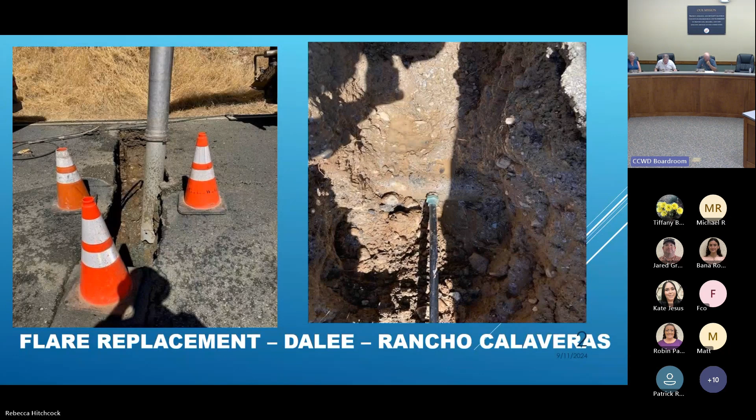So here we are with the flare replacement on Dalee. These come up when the service lines are replaced, oftentimes as a result of the failing flare on the water main. In the image on the right, you can see the water main is partially exposed with the flare connected, and the great work the Jenny Lind crew is doing, you can see the service pulled out of the ground with multiple repair clamps on it.

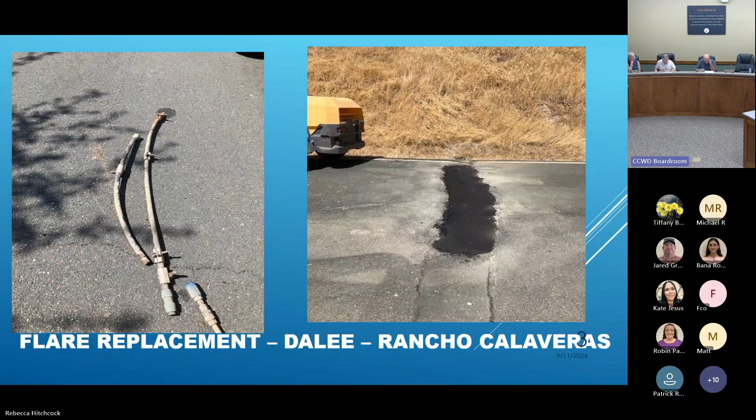So with 37 service lines over the last year, we're still in the noise phase of figuring out what we're looking at in terms of failure. We have just too many right now, and so we need to get ahead of that. That's part of the good work our utility crew does.

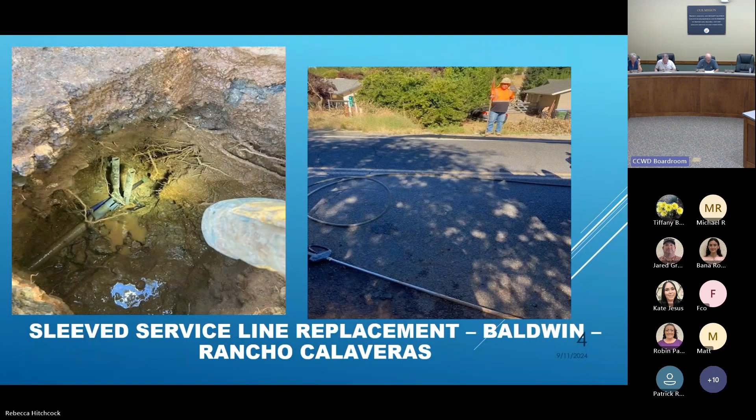This was an interesting one, excuse me. Service line on Baldwin that was sleeved in a piece of plastic that developed a leak, so our folks replaced the entire service line. You can see it sitting in the conduit there in the image on the right and the left. But what's really interesting is the poly developed this like blistering.

We think it could be from the heat sitting inside the piece of conduit and getting hot. Our guys out in the field had never seen it before, it's really interesting. Do we have a lot of that material out in the field? We do, we have a ton of it. Most of the service lines in this service area, actually all of our service areas, are made out of polyethylene.

So we've seen it flake off, almost like if you can imagine a corn flake coming off the poly, but not bubbling like that. At least these folks have not seen that. Is that something that could cause a break? I would definitely think it would have an impact on the integrity of the service line over time. I have a piece of it in my office, actually, I was going to bring it but I forgot.

You can see the inside of the line, and it doesn't look like that, it's not that. So I would say over time, I'm sure, but in this case it wasn't the result of failure. How long had this one been in the ground, any idea? I mean, judging, I would say for quite some time, perhaps 20 years, but that's just a guess at this point. Could it have been damaged like that in the beginning and then they sleeved it because it was damaged? Good point, could have been.

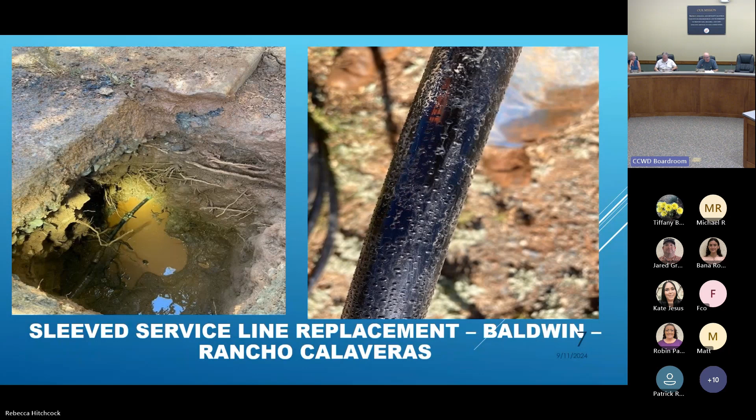Could have been, it's just kind of one of those ones that makes you scratch your head a little bit, because there shouldn't be any air or anything to create heat down in there. That's a good point you make, actually. Could it have already bubbled like that and they used it anyway? Yeah, let's put a sleeve on it. Hey, it's bubbling, let's put a sleeve on. Yeah, that makes sense, take them a while.

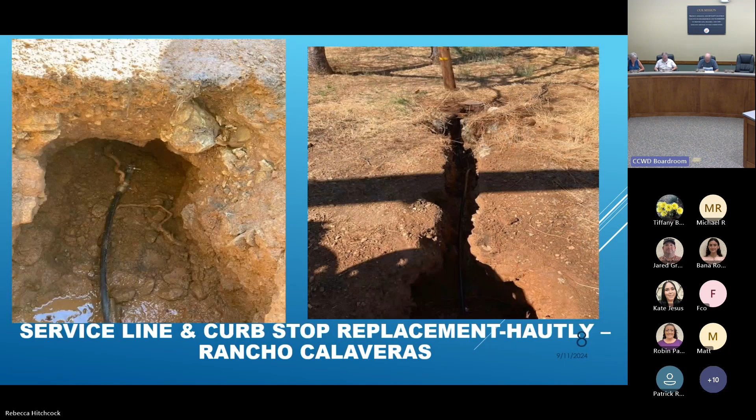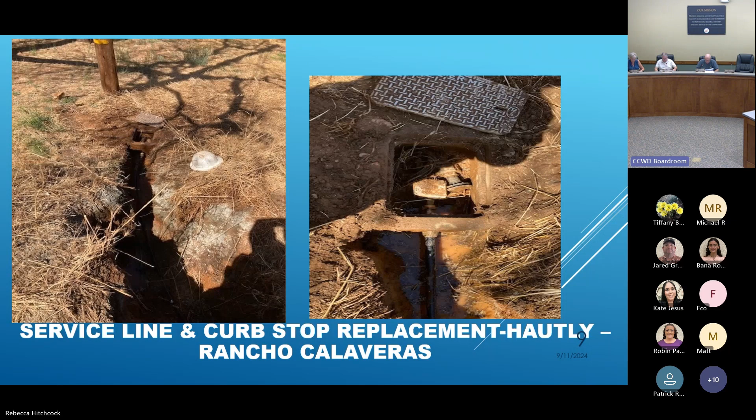More of the same service line and curb stop replacement along Hautly. Can't say enough great things about the work our folks do. Kind of the new flavor in the image on the right is you see a new Mueller meter with a node next to it. With the meter box lid somewhat askew, the node is actually the antenna. So that's what some of our meters down in the low country look like now. I guess they're called high pressure meters there.

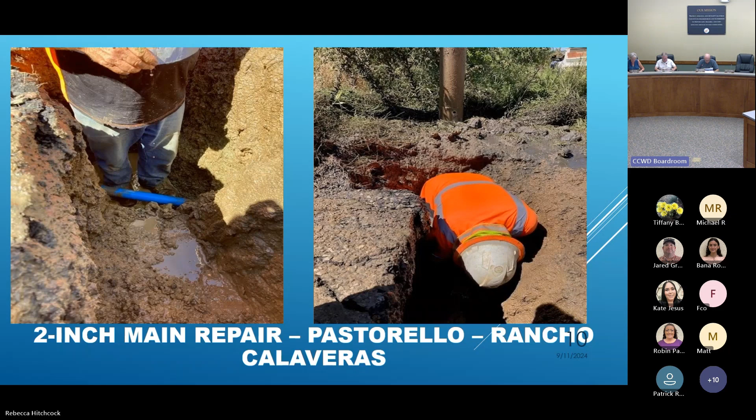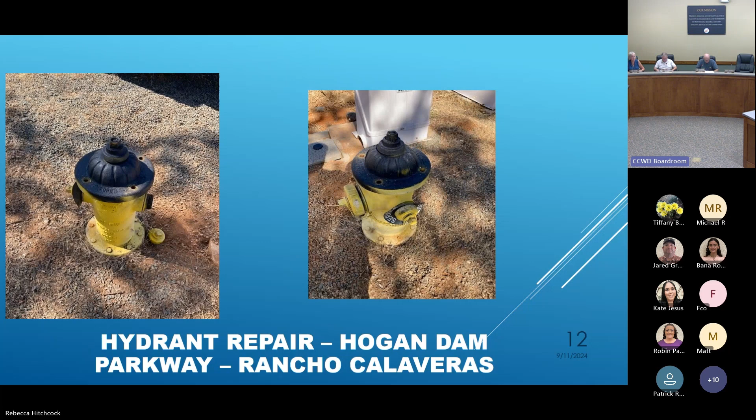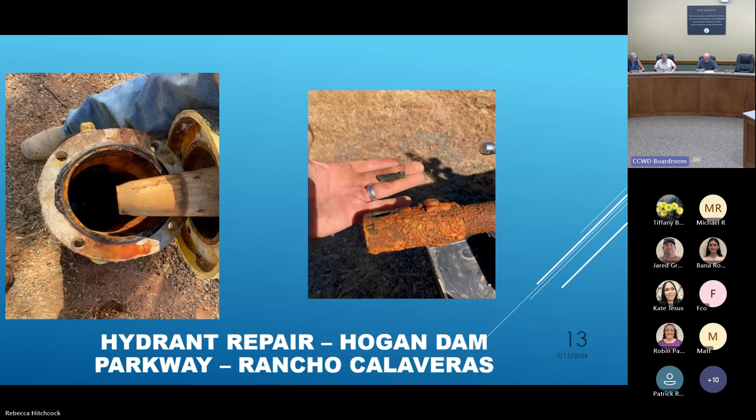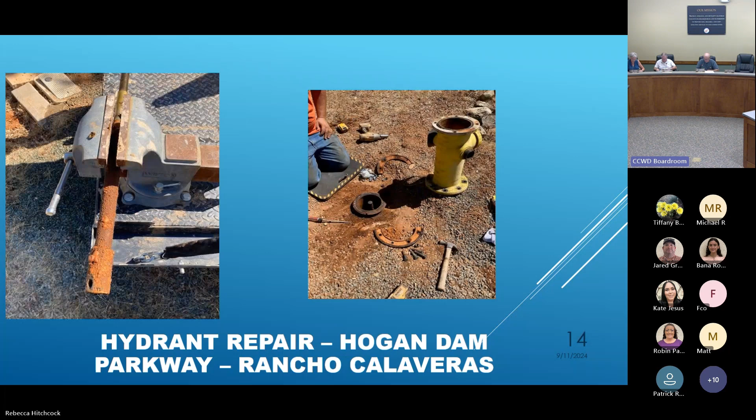Hydrant repair. We had conversations last month with the fire protection groups, an after action review of the Arrow fire, talking about how the district works with local fire departments to ensure the integrity of fire hydrants. This is more of that conversation along Hogan Dam Parkway. We have a stretch of distribution system and this fire hydrant was out of service. Walking through the stem with the bolt at the base of the stem, you can see it had just broken off in the image on the right. So our folks will go in, take repair components, and replace the failed components to rebuild the fire hydrant. You can see the cleaning of the stem in the image on the left, getting off the corrosion, and in the image on the right, the breakaway flange being replaced, the body of the hydrant being put back after everything is cleaned and the breakable parts are rehabilitated.

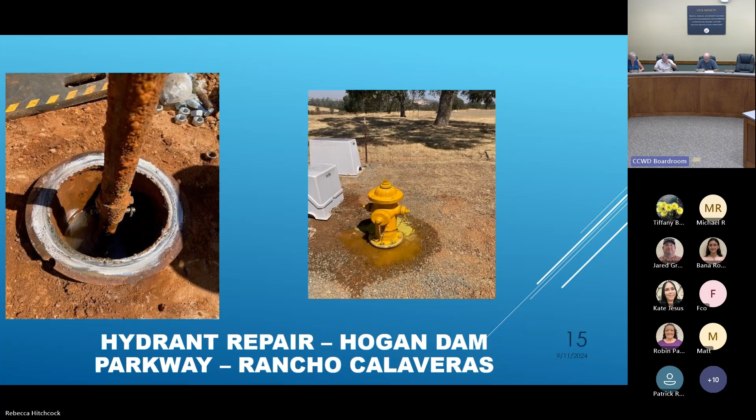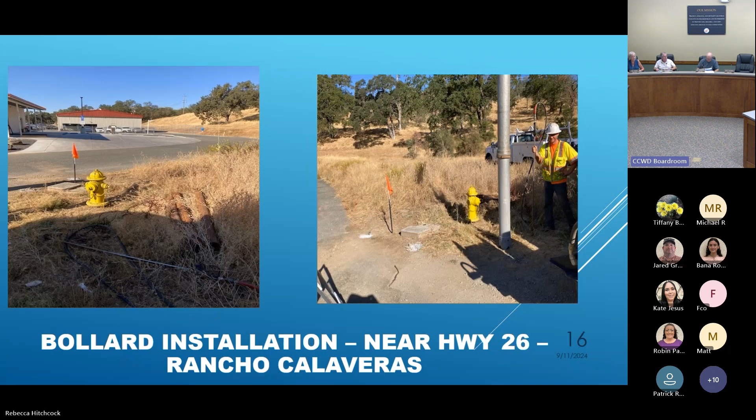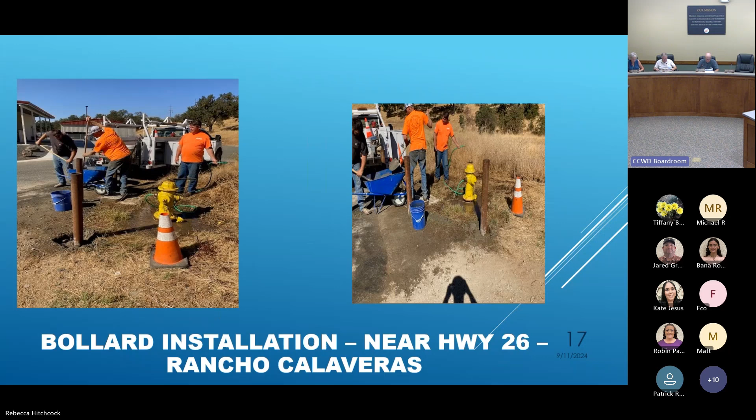Can't say enough great things about the work our folks do. This is an interesting one. We have some meter boxes that are just continually getting damaged from vehicle traffic, so sometimes we'll install bollards to protect the meters, and that's what we did here. The distribution crew members poured steel pipe filled with concrete in front of, in this case, a fire hydrant, and then paint those safety yellow to keep our infrastructure protected. Actually, there's a meter too, keep everything protected.

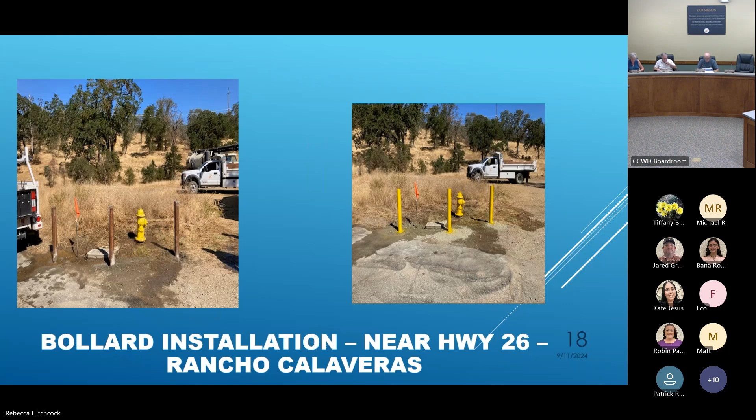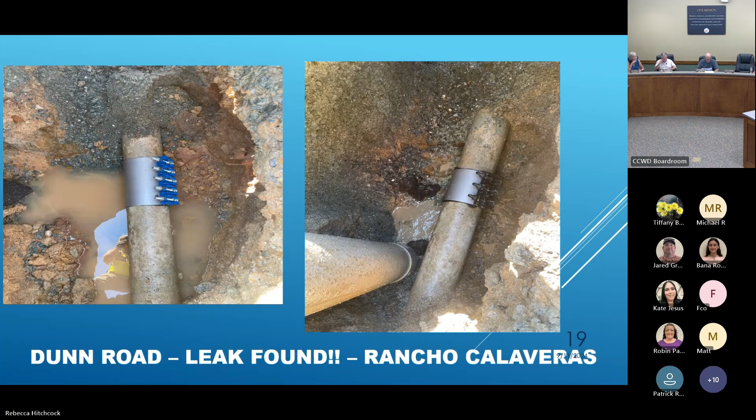In August, the construction crew worked with the distribution crew, and Pat Burkhart, our construction maintenance manager, was actually out in the ditch working with the guys. They found this leak that has been leaking for approximately 15 to 18 years. That's this one you see in the picture, and it's been repaired. In the image on the right, the black rubber beneath the full circle repair clamp is simply blown out. There was a repair at some point in time, and that rubber had just blown out over time, and it was weeping and causing a leak. Hats off to the guys for finding that and fixing it. That one's a good one.

Here's one in copper. So AC mains, often in the dry weather, do what's called shear breaks -- the main will literally break in kind of a perfect circle or ring around the main, and that's what we have here. Those are repaired with a full circle clamp. This is a cross-country line that feeds the Reed's Turnpike pump station, a really critical line that needed to be repaired after hours.

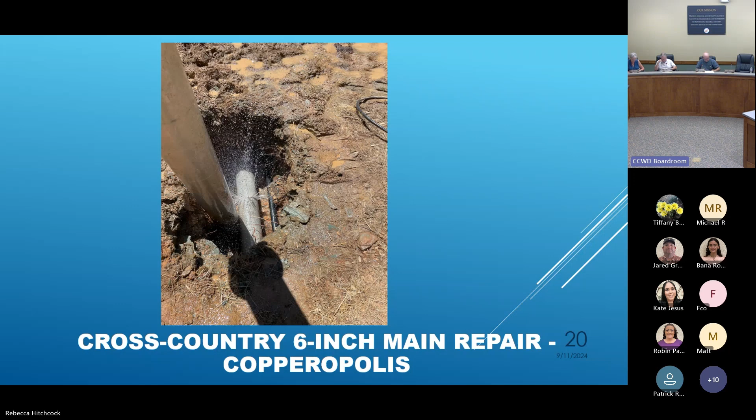It was ID'd kind of late, and the folks out in the copper distribution crew did a great job getting after it and getting it fixed.

Here's one in West Point. This is a 2-inch raw line right at the base of the Bummerville Reservoir Dam face. There was a significant amount of water coming out of the dam in front of the dam, which can freak everybody out pretty quickly. Doug did a great job up in West Point diving in and understanding what was actually going on, and it turned out to be a valve. You can see the brass kind of just falling apart in the image on the left. He was able to get in with the operator, Scott Grutzmacher, and they replaced that failed valve and piping, installed a new valve and new piping, and then reestablished the G5 lids on the line. Hats off to them for knocking that one out.

If you could go back to the prior slide, there's the 2-inch raw main right there. Yeah, on the previous one.

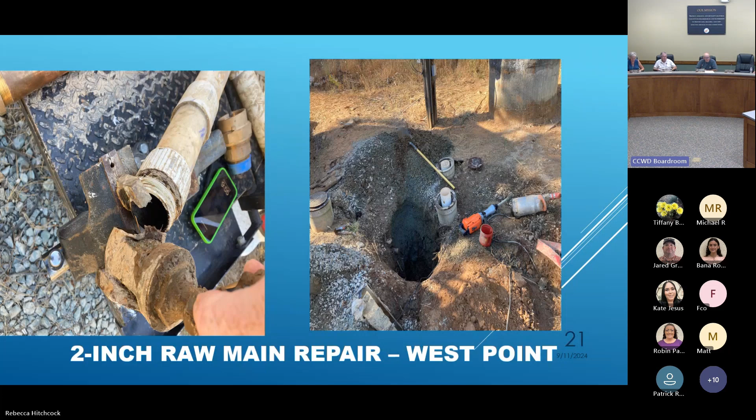There's an orange tool there. It looks like it's a jackhammer, but is it a battery powered jackhammer? Yeah, it looks like it's a battery powered Sawzall, I believe. But is that a little jackhammer? Cutting the vines. Well, it's a little spade. Yeah, oh, he had one of those small jackhammers. Yeah, a little battery powered jackhammer with a little spade bit on it. That's what it looked like to me. I would have loved to have had one of those when I was digging in tools. It would have been great.

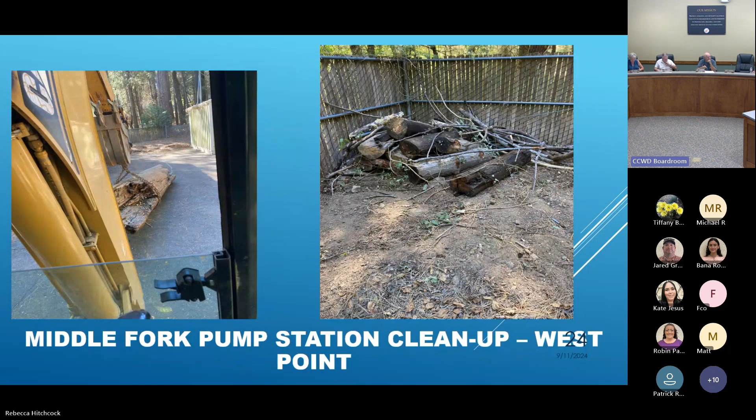Middle Fork Pump Station. As you all know, Middle Fork is a secondary source of supply for the West Point Water Treatment Facility. Over the past few years, we've had a significant amount of debris buildup down at the pump station. The treatment and distribution crews that work down there worked closely with our facilities maintenance folks and were able to pull out all the snags and debris that were stuck in front of the intake there on the Middle Fork. As you can see, it's quite a pile.

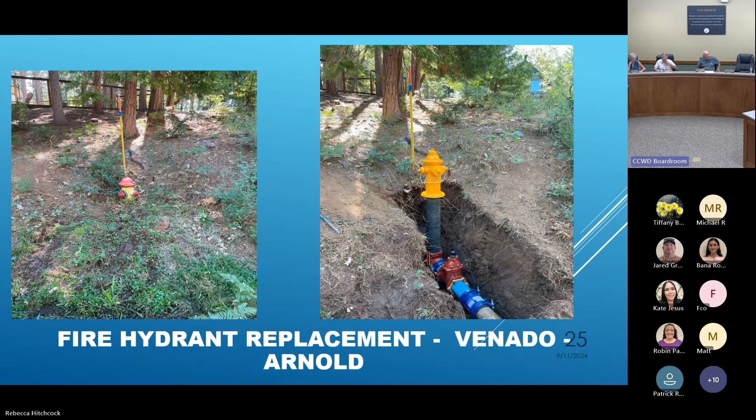Moving up the hill to Arnold, and reflecting back again on the relationship with the fire protection districts, this one's an interesting one. The image on the left shows the hydrant on Venado partially buried. I think that was even brought up in the conversation about fire hydrant O&M. This was a replaced fire hydrant. You can see the valve and the hydrant in the image on the right with the exposed ditch there. Hats off to the construction crew for the great work they do, because you take a hydrant that was partially buried somewhat in the bushes with some growth around it, and then put a concrete apron around it with the valve, and that's much more effective and much easier to operate.

So, how long did it take them to drill that hole? Is that a couple day effort right there? That's a 1 day effort for the whole shoot match. They took the backhoe and excavated it.

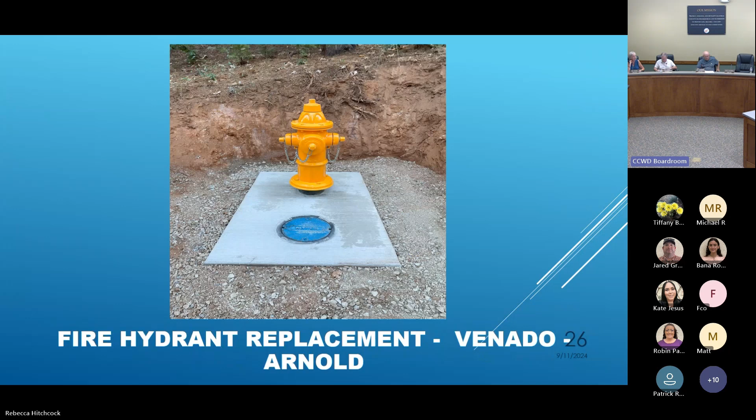What kind of inventory do you have on PRVs, anything? We do. That's a great question, because in the past couple of years we have budgeted to have replacement PRVs installed. Oftentimes what will happen is we'll have a 6-inch or a 4-inch PRV in, say, the White Pines barn or in the shop here at the yard, and that's usually it. So if we're going to have a large 8-inch PRV with a bypass, we're going to order that through capital outlay through the budget process, and once we receive it, we're going to make a plan to install it.

So almost as if you were on cue, Director Underhill.

Oh, that was nothing. The Dorrington pump station PRV replacement was one thing that the construction and distribution crew recently completed in the month of August. They did a fabulous job.

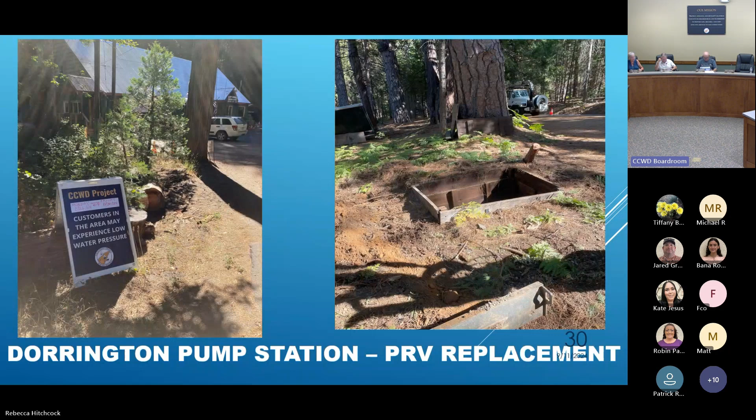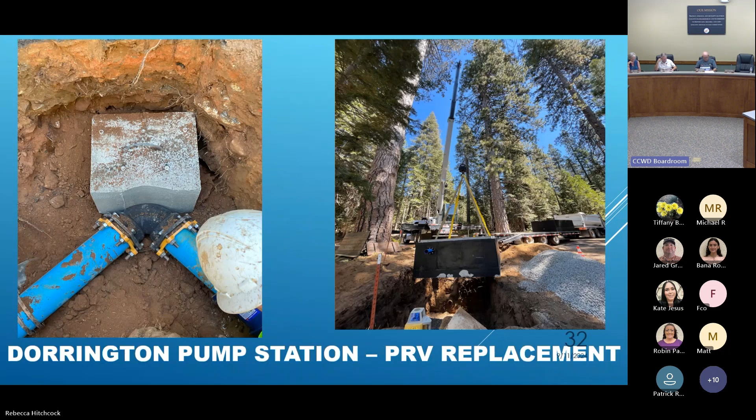So it just illustrates the consideration that our guys have. They're understanding the hydraulics of what the work is that they're about to do, and they're preparing to address any deficiencies that might happen. Well, while that's - that's why we have such good staff out there. Yeah, it's great stuff. It's just really great.

And so the vault in the image on the left is set. Joe and company taking a breath and taking a look at the work that was done. Hats off to them - that was a big job. Absolutely, and they knocked it out. PRV's in operation currently and everything's smooth, knock on wood.

New valve installations. So along with the considerations for installation of new construction come the considerations of how do we optimize our system and make it better. Some months ago, we had a water main break that resulted in Snowshoe Springs HOA, which receives purchased wholesale water directly from us.

Having to reduce their use, and some folks were out of water. Our folks in the distribution crew were able to look at a way to provide a redundant source of supply. Like if we install a valve right here, if we have an issue over here on this part of our system, we can actually keep them in water by sending water this way. So that was part of what this work effort was, a way to optimize our system and provide better customer service to our friends, neighbors, and customers.

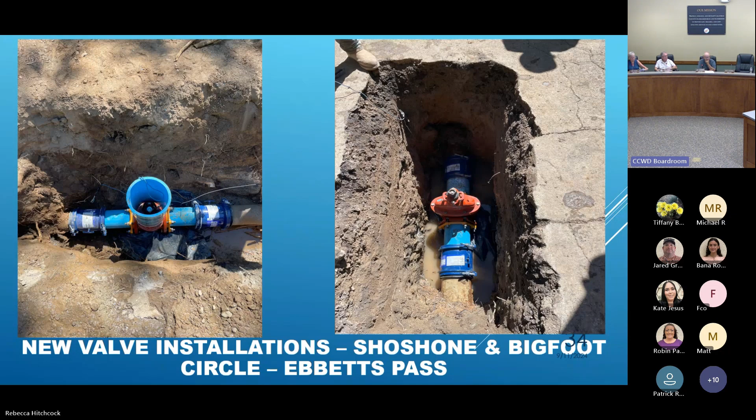The good old Forest Meadows Pond, doing cleaning work around that. They come down like a swarm of bees and clean it all up.

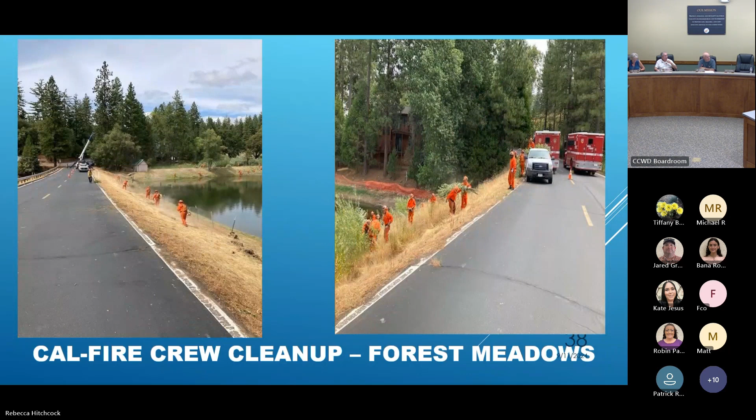Hats off to Ron, Rose, and Eric Martinez, who work with the CAL FIRE crews, and hats off to the crews for all the good work they've done.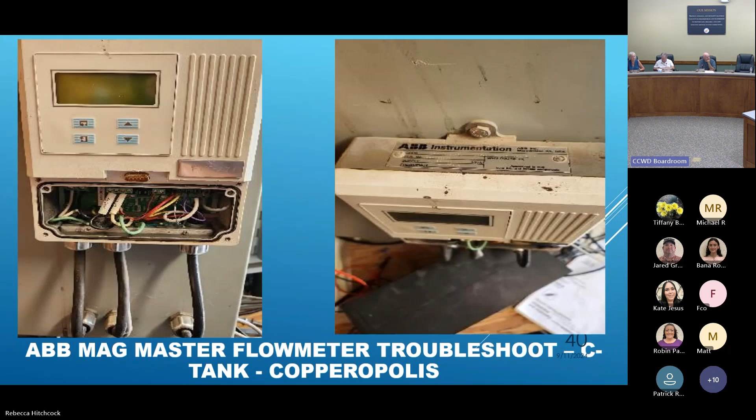I mentioned the electricians had 86 items. A lot of them are associated with this ABB Magmaster flow meter troubleshooting at the C-tank in Copperopolis. So the flow meter dies, and treatment operators can't see what the flow is on the computer system on SCADA, remote from the facility. Electricians deploy, find out what's going on, and fix it. The variability of tasks that they take on and complete is impressive.

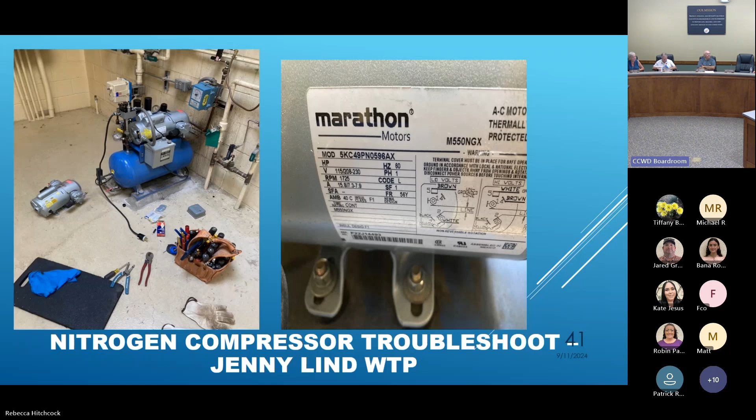So here we are - you call this a nitrogen compressor, but it's actually an air compressor. At the ozone generator, you're siphoning off the nitrogen that exists naturally in the air, but you're using an air compressor to do so. So here they are, repairing the air compressor.

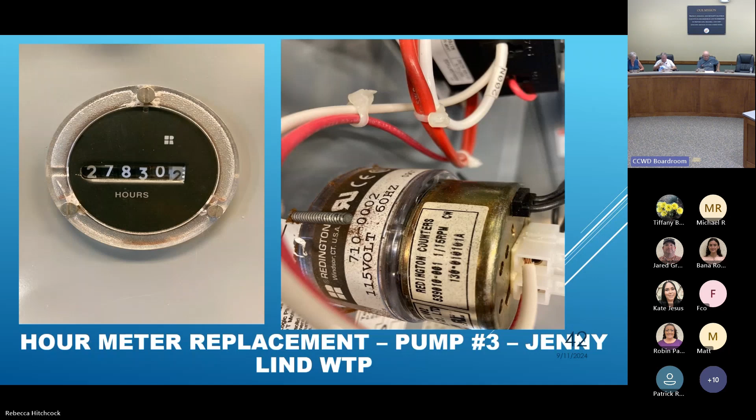Hour meters are critical. So we talk about infrastructure and infrastructure age and replacement. We have hour meters on our pumps and motors, and our operators document the hours and will adjust the operations of pumps based on how old or how much operation each pump has. So it's really important that those hour meters work. What's the life expectancy of a pump in hours? You can get 8,000 to 10,000 hours out of a pump easily if you maintain it properly. I'd say probably double that, 10 years of pump operation.

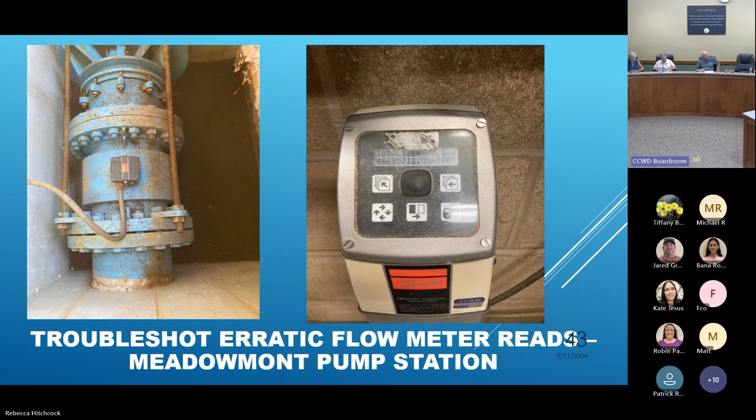Hats off to Doug Turner and Scott Grutzmacher up in West Point. They do a great job of meeting our needs up there. And with that, do you all have any questions?

Yeah, Damon, could you toggle back to slide 27? It's an old PRV abandonment.

I noticed this when you had it up there before, that there's a lot of dirt, rocks, and debris in the bottom of that. Whether that's the old redwood tank or a concrete tank, but is that coming up through gopher activity or something in the bottom of the vault? I'm not sure about this particular vault, but some of the vaults were at a depth that somewhere in the past the district added rock to the bottom of some of these PRVs to make them shallower.

So I don't know if you guys recall, that one was vertical - that used to be a redwood box. We had to replace that several years ago. Now it's just attached to the 3A. So I would just say that's the floor then, that's the dirt on the floor for that particular PRV vault. But it looks like the dirt has come up to the midpoint of the piping or something.

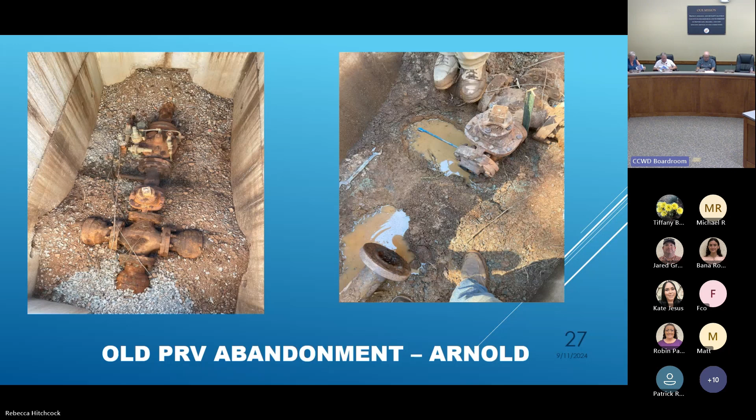But my question was, you have these new vaults that you're putting in. Do you ever put like a very poor cement mixture in the bottom just to keep rodents and stuff from coming out?

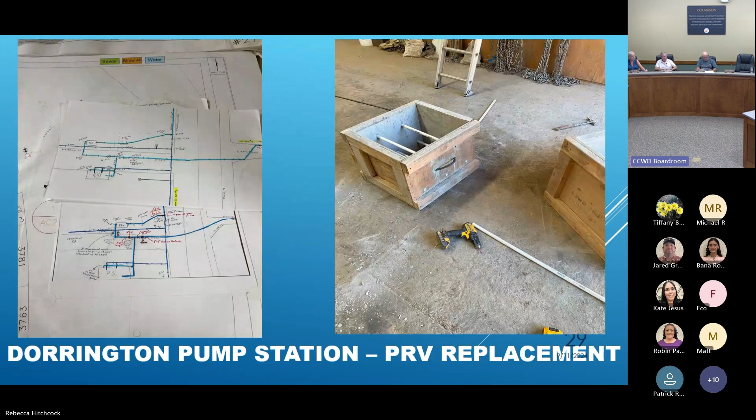Yes, all manner - I was going to see if we can see it here in this one, and it's kind of hard to see, but all manner of the above. So some of them have floors, some of them you'll pour the floor. A lot of the work that the guys have been doing in the past is if there isn't a drain in the floor - that's often why there wouldn't be a floor - you allow the water that gets in there to just naturally perk into the ground. But a lot of what our guys do is they go out with a hole saw and drill a hole to make a port to evacuate any water that shows up in the vault, from failure of piping or whatnot. But we have all manner of the above.

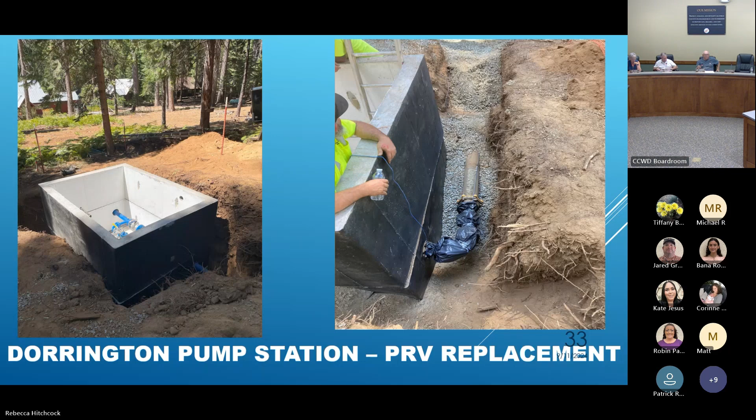Yep. Good pictures, like them. Yeah.

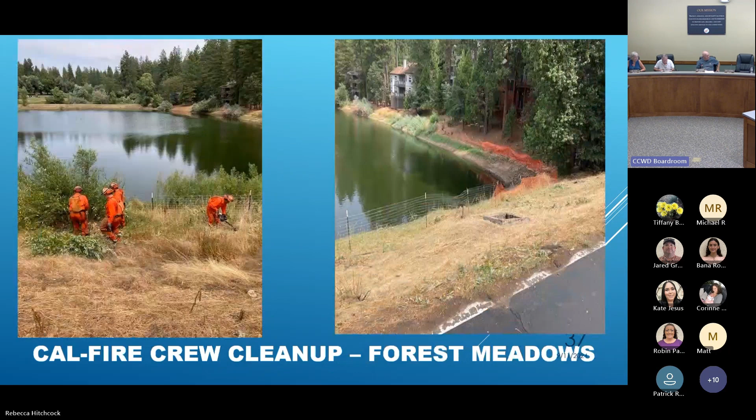Thank you, I just had one question. I know we've been talking about this lead thing, and you did have a notation that you participated in reviewing the plan for lead service line inventory. So, you know, there is a plan. Yeah, so the plan is in effect and it's almost complete.

With the lead service line inventory, just a real quick explanation: all public water utilities in the country are required to complete an inventory for customer-owned service lines and provide an understanding of what it's made out of. Is it lead? Is it galvanized? Is it galvanized and in need of replacement?

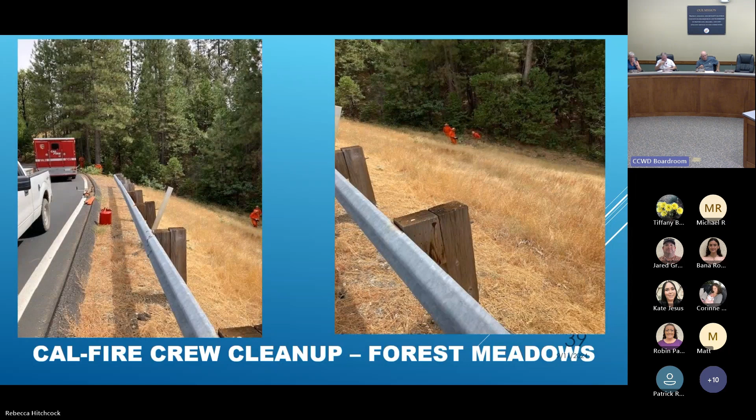Is it copper? Is it plastic? Is it PVC? Is it polypropylene? There's a couple ways that the feds are allowing water districts to do this, and one is by statistical analysis. So CCWD presented a plan to the California regulatory bodies who then report to the EPA. That was a statistical analysis. So rather than look at all 13,000 plus service lines, we looked at a random representation, right around a little over 1,000, and based on that assessment, we report out.

So we have until October 16th to complete the work effort that's coming up. And we have, as of right now, about 400 left, less than 400. So our crews are doing a fabulous job and they're ahead of schedule.

Because I know we had talked about how extensive that was going to be. And if you're almost through, you guys have done wonders.

I'll tell you that a lot of utilities have not even started, and a lot of larger cities have not even started. In some ways, rightly so, because a lot of folks in California were continuing to say, hey feds, time out — how are we supposed to tell you what private homeowners' infrastructure is made out of, and how are you going to require that of us? So there's a lot of folks still trying to understand the requirement. We were able to look at 1,000 and knock it out. That's a victory for us.